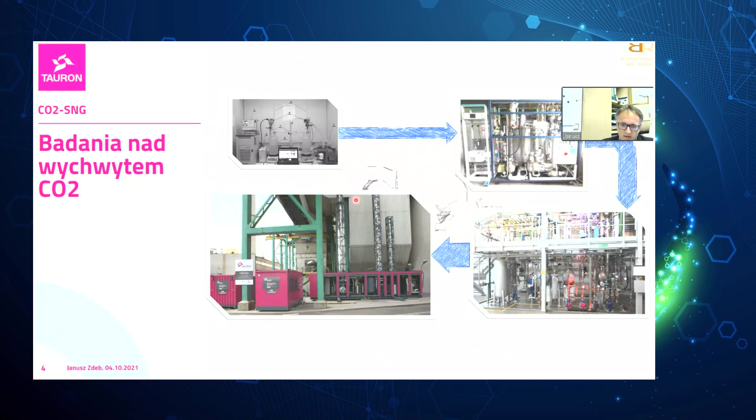In Jaworzno, we had a fluid bed boiler. The installation that we built contained mostly a technological container. We had the desulfurization unit there with additional sulfur removal. We had absorption and desorption columns, whole sets of exchangers and washes in the technological container, then the supervision container in which the technological process was supervised and all the data were registered. But owing to the fact that the installation was modular and mobile, we also have a storage container, to which the dismantled columns would be put for transportation purposes. This installation makes it possible for the gas to flow at 200 cubic meters.

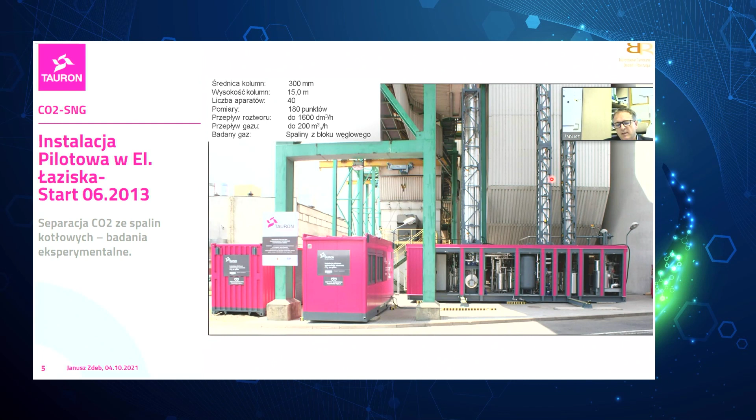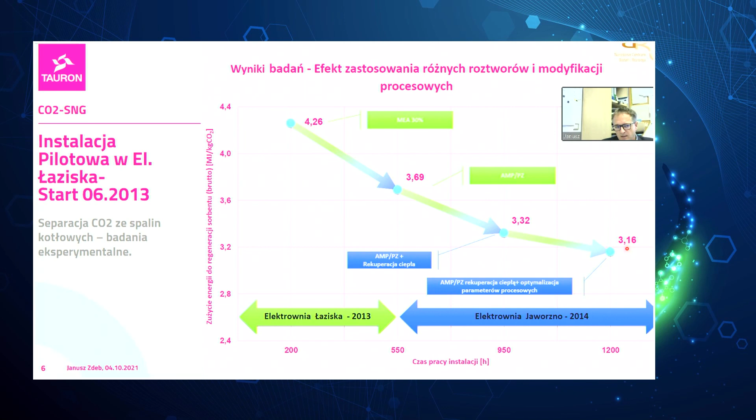We're talking about boiler fumes here. The height of the tallest column is 15 meters. Over 180 measuring points were installed. We started testing in 2013. The first studies were not really optimistic. When you look at literature data, as far as the use of energy for the regeneration, we started at 4.26 megajoules per kilogram of captured CO2, but we managed to get down to around 3 megajoules per kilogram of CO2 captured.

As for the implementation, we've implemented over 30 research campaigns. Over 300 tests were carried out with different changing parameters that would optimize the process. And the result is over 2,000 hours of operation of this installation in those two locations mentioned, and the capturing of around 100,000 kilograms of CO2.

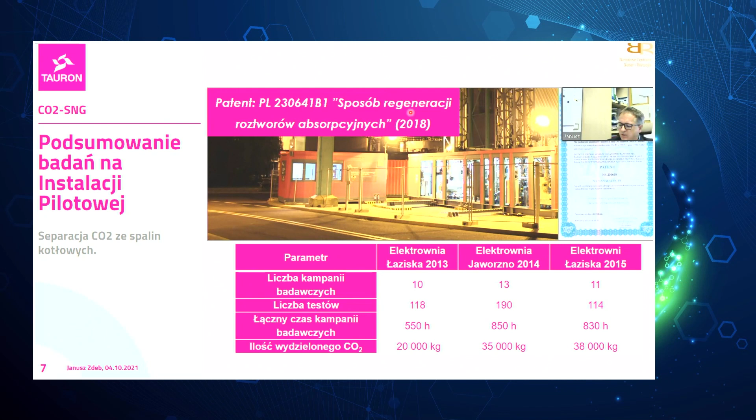Owing to this endeavor, we've managed to get to the heart of the process. We've learned what its advantages and downsides were. Definitely, our approach was a novel one, and owing to this, we've elaborated our own way of regenerating amine, which resulted in a patent that was granted in 2018.

As we know, the energy policy and the stress on development of sources that are pretty unstable on the system make it necessary to introduce drastic changes in the image of power engineering. As the former speakers, moderators said, we are shifting to the other dimension of power engineering, the one in which the dominating function will be played by hydrogen.

With this experience about CO2 capturing and knowing that in such volumes CO2 cannot be accepted and stored, we've taken up steps that would make it possible to change CO2 into a product or for it to become a carrier of energy. And here, analyzing different technologies, observing global research trends, we moved towards power-to-gas technologies, so those concerning methanization.

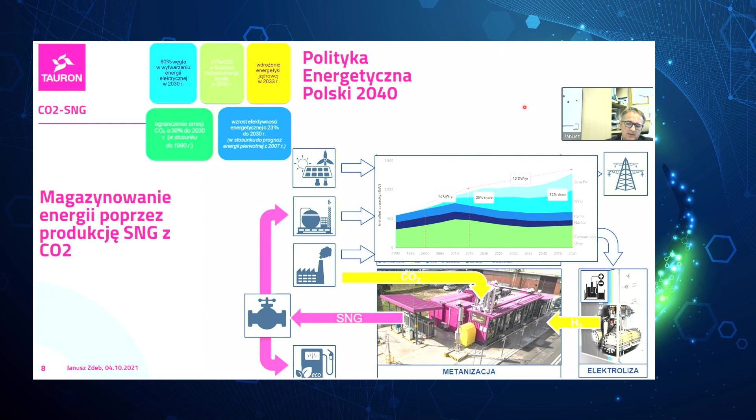We believe that CO2 can be a very good carrier of green hydrogen, and it can be a certain part of the storage, as well as an element stabilizing the power system. This is also confirmed by other sources and publications. You can see any technology of energy storage has its place in this chain, depending on what functions it is supposed to deliver. It should find its way to the mix of the energy system, to the power system. We've moved towards the high-scale storage solutions and also long-term storage solutions.

As I said, the power-to-gas technology, despite it being treated as a storage system, also responds to a few issues that the power engineering today is bothered with. This is related to the reduction of CO2, to the increasing number of unstable sources, so renewable energy sources, which in turn makes the power system, our power plants, work pretty dynamically in terms of the activities they perform within the energy system. Depending on how we develop this element, it can also constitute a protection measure when thinking about natural gas.

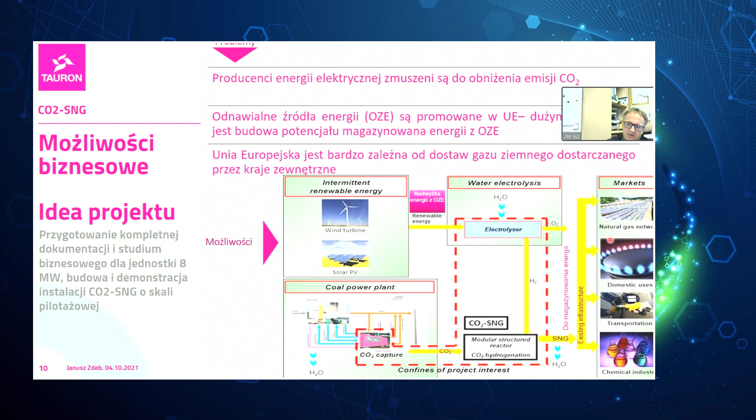So to sum it up, we have intermittent renewable energy, which can be turned into hydrogen. The CO2 source, that is the industry of power engineering, combined with hydrogen, gives us a synthetic natural gas, which can be located on the market today, so it can be given back to the grid, or it can be consumed by end consumers or in transportation.

Looking at it this way, we've managed to obtain financing from the European Institute of Innovation and Technology, EIT, from the Polish section, Knowledge and Innovation Community. We constructed a consortium, an international one, in which Tauron Wytwarzanie was a leader, responsible for the construction and testing of the entire system with methanization. We have foreign partners, both the scientific ones and the industrial ones. We've got CEA, the major French research institute that studied the operations of the reactor on a small scale. We've got Atmostat, responsible for the production of the reactor, and also the Polish side.

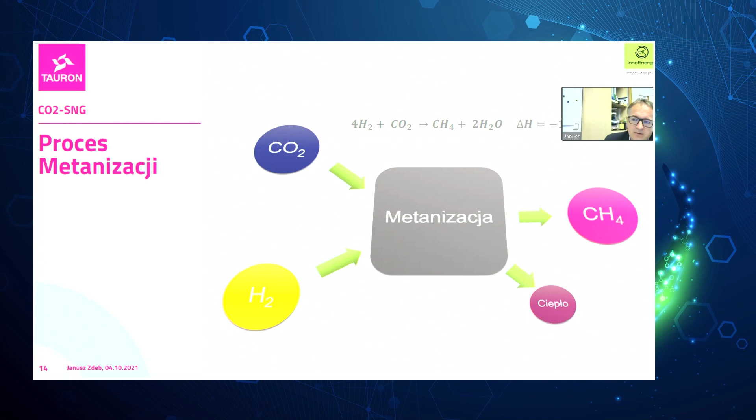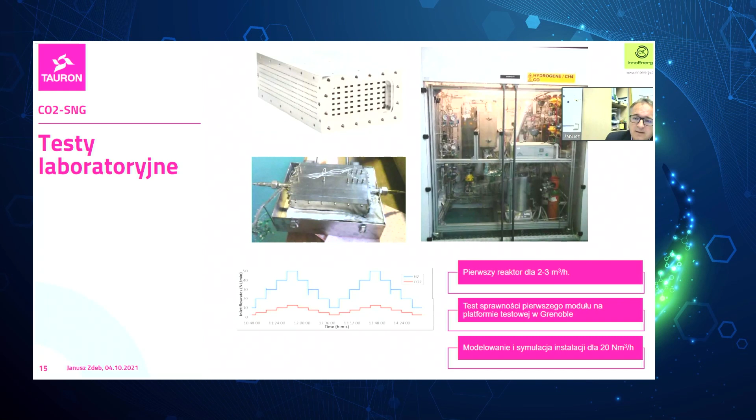Janusz, 5 minutes. Just to remind you, the project was launched in 2015 and completed in 2019. We know what methanization is about. The most important element is the exothermal surplus of heat. The laboratory tests were carried out in France using such a small reactor.

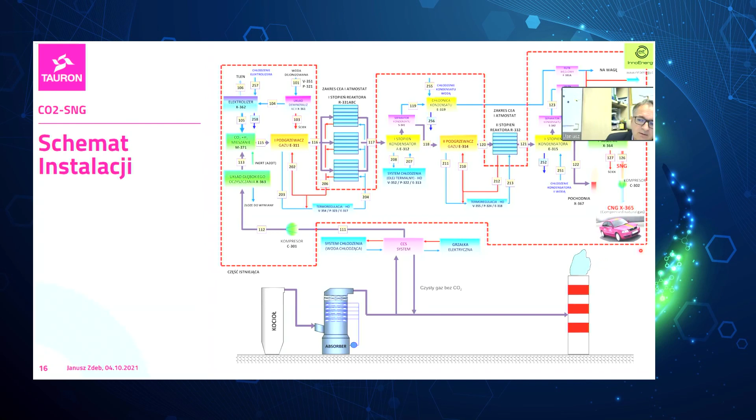The installation, the system tested, contains the electrolysis set and also the CO2 capturing unit, where CO2 is compressed, purified, then it gets to the mixer, then the hydrogen from the electrolyzer is preheated. We have a 2-stage set here. In the first stage, we have methanization, then condensation, cooling, heating. The other step of the reactor, and then depending on the parameters, the gas can be either given to the flare or it can be given to the compression station so that we can use it as CNG.

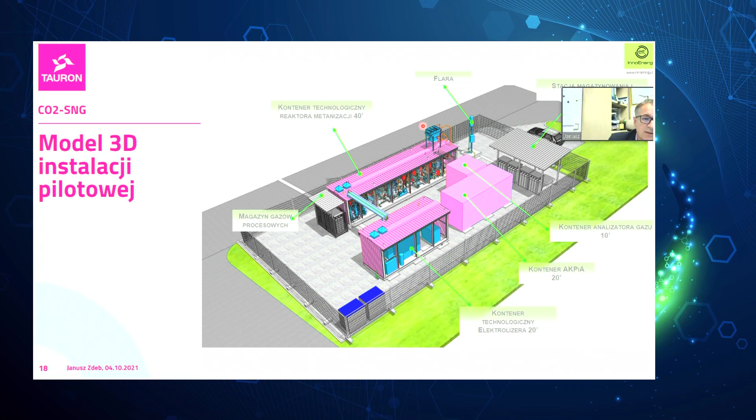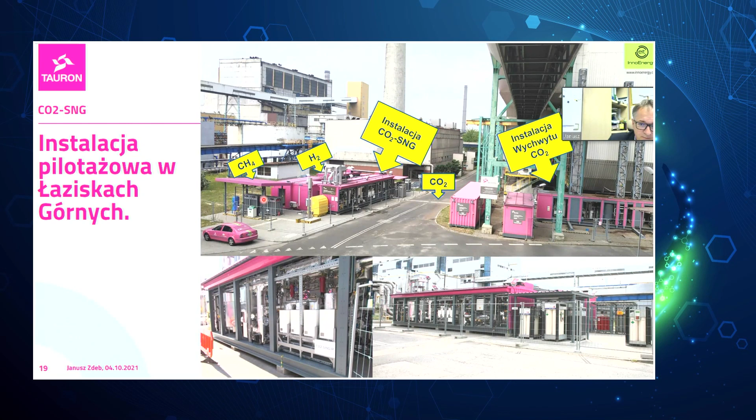So we've got the AKPiA container plus the compression station and a flare that was used for testing gas that does not meet requirements. Well, it was a test. So we tested different parameters. Not always did the quality suffice to compress methane. That was a reality. So on the right-hand side, we've got the existing CO2 capturing unit, the CNG one, and a car specially designed for CNG filling up.

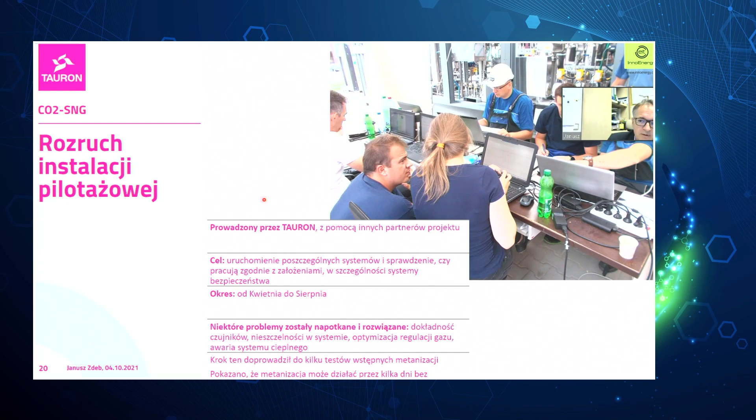A lot of problems occurred. It was new to us. The entire system was moved to the technological container vicinity itself. As you can see, there was an online analysis of all the parameters so that the installation could be launched in the safest possible manner. The first gas with CO2 from power engineering was generated in July 2018.

This is a video. I'm not sure whether I'll be able to play it to you. Janusz, I don't think we have time for it, so let's skip it then.

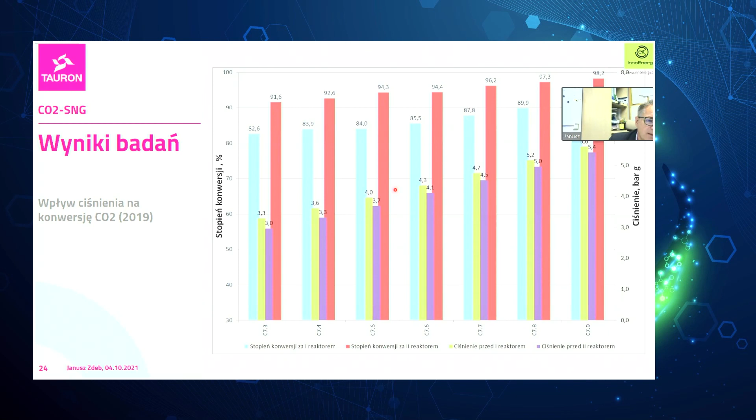The first results in 2019, you see 80% of efficiency as for the capturing. We tested most of all the impact of pressure and temperature on the process parameters, as well as the flexibility of the operation of those methanization reactors. We can see here the changes depending on temperature, depending on pressure. You can see particular efficiencies on the first stage and the second stage of the methanization reactor.

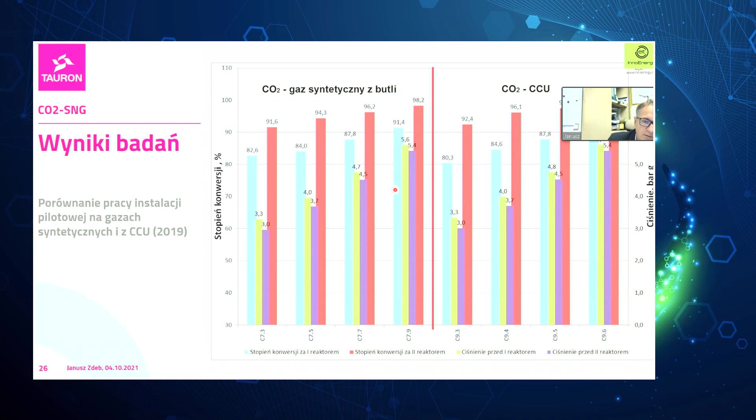We also compared, owing to the fact that this is a research installation, it was possible to apply synthetic gases. CO2 was synthetic from the tank, and also CO2 from the capturing installation that I showed you before. There are no differences, exactly the same parameters. The installation worked exactly the same way.

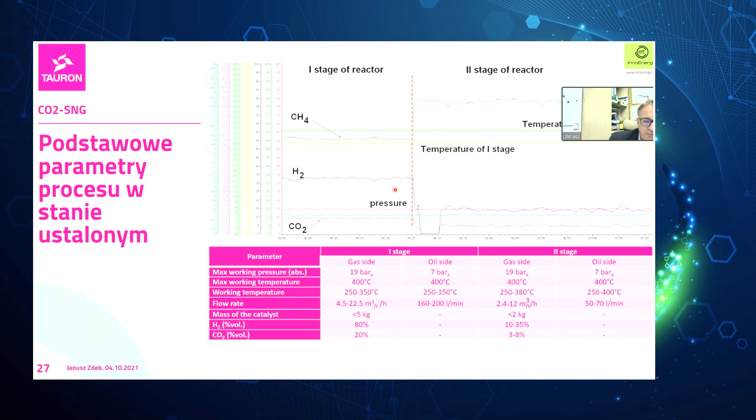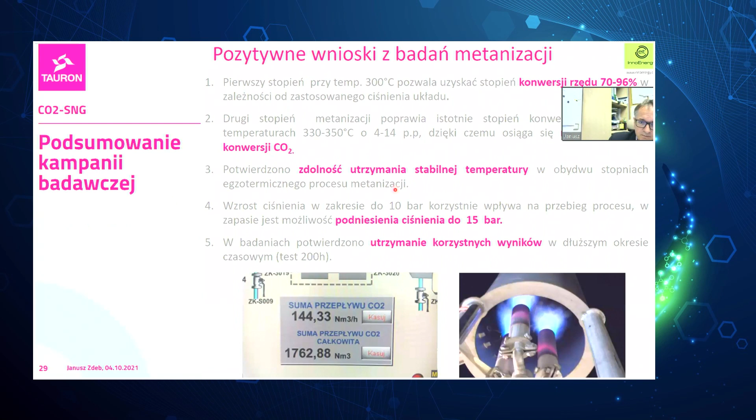A minute to go, Janusz.

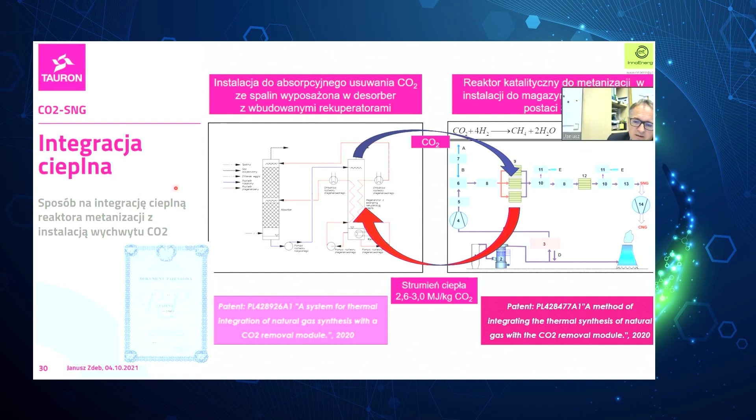Okay, what I drew attention to is the volume of heat from the methanization process makes it possible for us to cover the needs for absorption of CO2 in the installation. So we can say that energy-wise, we can get a balance. And this is a concept that was awarded with a patent last year.

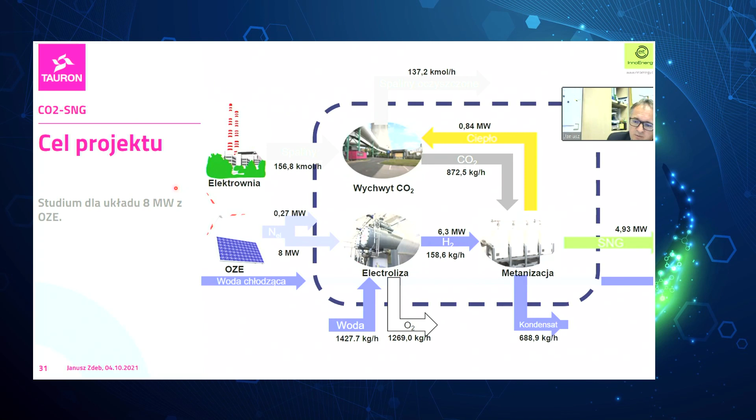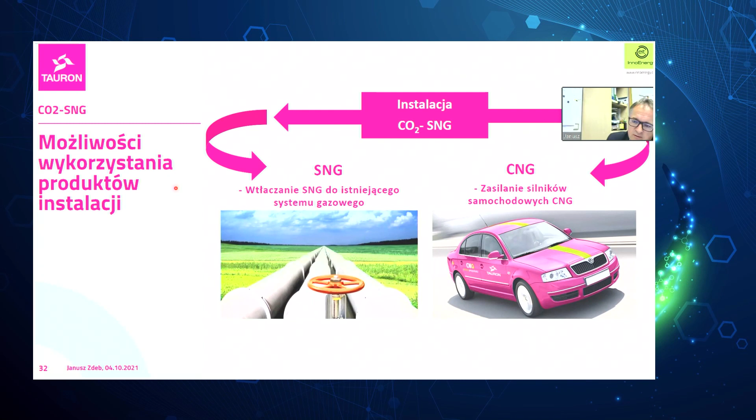As regards the upscaling part, we prepared a concept of installation equivalent to 8 megawatts that would make it possible for it to also use RES and work with the existing capturing system in the power plant. The installations make it possible for natural gas to be fed back to the grid, and also the products of this project can be used as transportation fuel in CNG-powered engines.

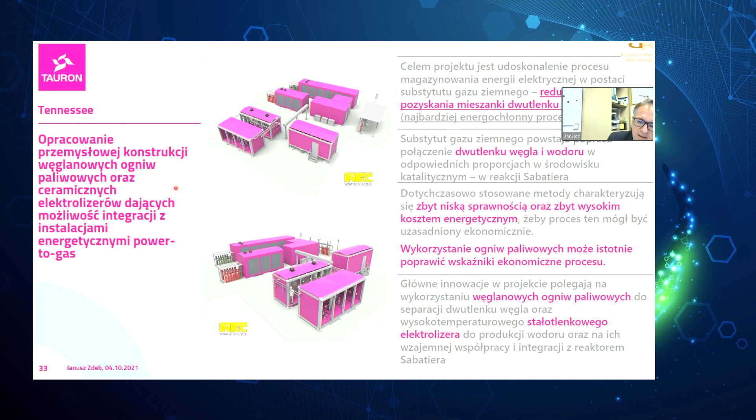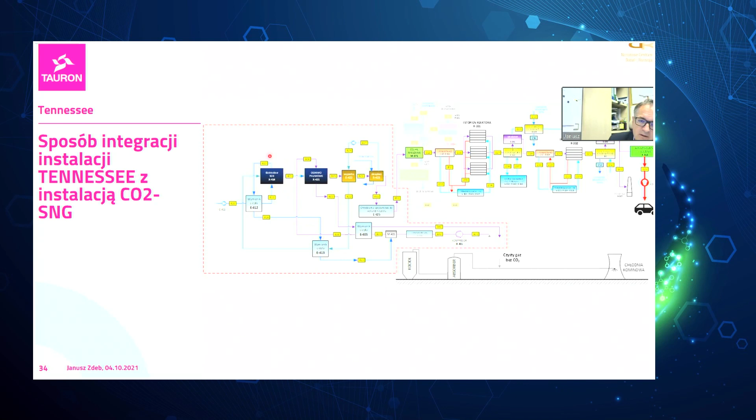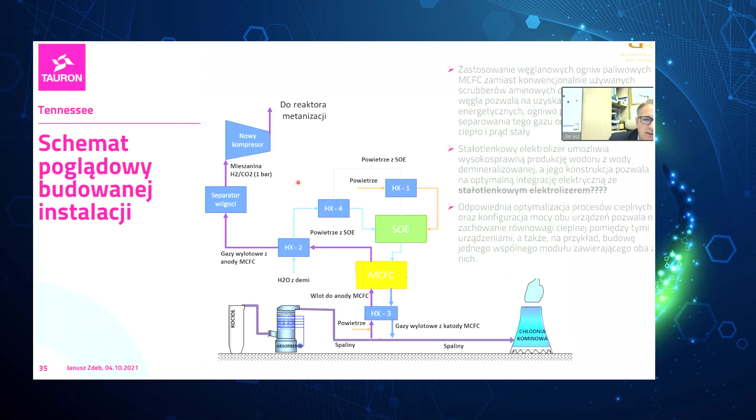For these activities that concern CO2 SNG, we decided to optimize research, and we struck a cooperation with the Warsaw University of Technology. The result of it is a project analogous to the one we have, but using fuel cells, but also ceramic electrolyzers. And the installation of CO2 capturing in the project is near to completion. We are substituting MCFC fuel cells, and we use the SOE electrolyzer. We certainly hope that this installation will be launched later this year. The first tests show that this is viable.

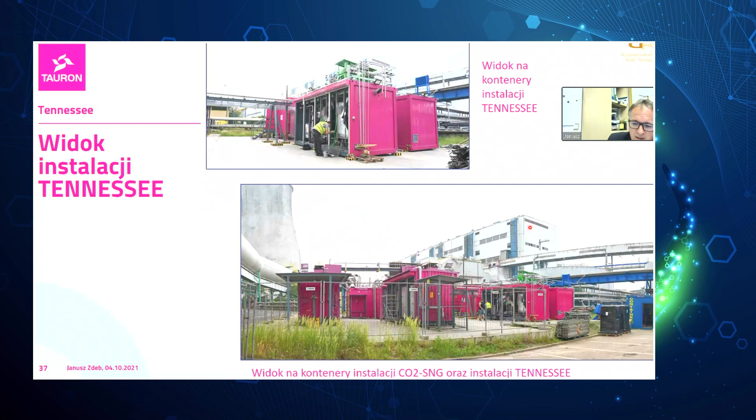Now, this is what it more or less looks like in terms of the Tennessee installation. This is this part, and whilst this part has CO2 SNG, it is combined with processed gases that we generate from the Tennessee installation. So we produce the mixture of CO2 and H2 in the proportion 1:4, so that we can deliver it to the methanation reactors. It is a test installation of rather low level in terms of scale. But we believe that the fuel cells have their future, so it is certainly worthwhile having a close look at them, developing their uses. In the meantime, you saw a few pictures of the actual system.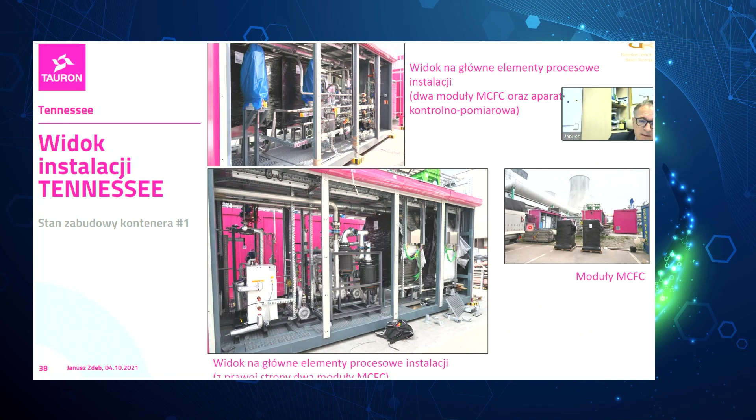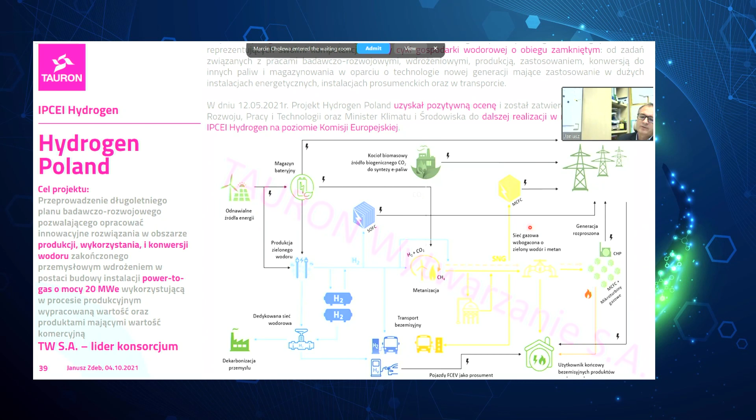And what can I tell you to end on? Well, all the experiences that we've gained over those 10 years resulted in the fact that we prepared a project within the competition IPCEI Hydrogen, and the Ministry of Climate and Environment was one of the parties that issued a positive opinion. So we are going to keep on developing those solutions, hopefully moving on to commercial scale, so that we can show the use of methane or hydrogen also in other branches of the economy, so that it can be used in an optimal manner and inscribe itself in the existing infrastructure with alternative uses.

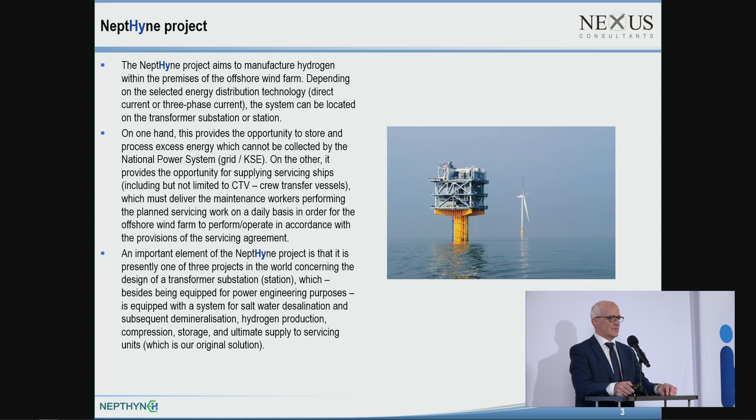As I've briefly mentioned while describing what it is about, we produce hydrogen from salted water. First of all, we want to use it for the bunkering of ships that call at offshore wind farms to service them every day. It is one of three projects of this kind implemented globally now. I'm talking about them being implemented because our project is not only in the conceptual phase, as you'll learn in a moment. The main issue as regards the production of electric energy...

...for the wind farms is that we cannot always give the electricity back to the national grids. These are fledgling diseases - the same was the case in the UK, Denmark, and so on. So they keep on searching for solutions.

What to do when the energy cannot be received by the land? How to balance the production of energy from offshore wind farms? That is why we are thinking about producing hydrogen locally.

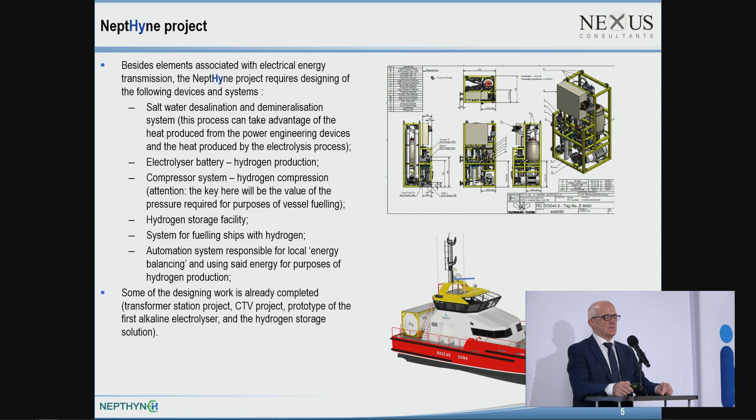As mentioned, the project constitutes a few components. It has elements that will make it possible to obtain salt water, desalinate it, demineralize it, then divide it through electrolysis. Hydrogen will be produced, compressed, stored, and then used for bunkering purposes for vessels.

The project, as mentioned at the very beginning of my contribution, involves companies actively operational in the hydrogen technologies cluster, but we also invited PCHET to it. PCHET is a forerunner in terms of gas solutions to be applied in the maritime industry.

In a moment, my colleagues representing particular companies will explain the area of their responsibility within the project. As of today, we have a lot to boast already.

The NeptHyne project is part of the National Recovery Plan. We have also managed to inscribe it as one of the projects into the European Clean Hydrogen Alliance, and the project today is one of the elements related to the realization of the European hydrogen strategy and also implementation of local content by developers and investors into offshore wind farms in our country.

When preparing this presentation, I wanted to tell you also about what possibilities result from the project, which is a research and development project, but also about its significance for the development of our own local economy.

On the one hand, we are talking about entirely new solutions in terms of maritime sector applications. So the vessels have to be fitted with a full-fledged system for producing energy from hydrogen and distributing hydrogen. We need to design the systems for the production of hydrogen, not only on the water, but also on land within the port infrastructure.

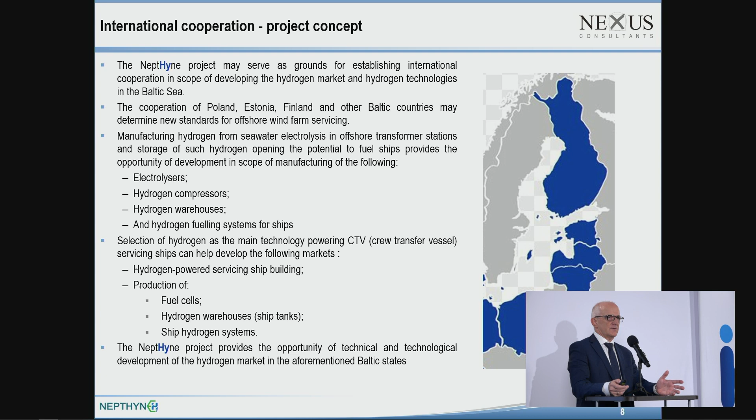So we will need suppliers that will deliver energy storage, fuel cells, all sorts of system elements needed. That is why we are laying foundations for the construction of a big business.

When we look at the developmental strategy in terms of offshore, let us see what kind of challenges we are facing today. Today, we have installed 23 gigawatts of power in offshore wind farms, but we are to reach, until 2050, 300 gigawatts. On the Baltic itself, there are supposed to be 93 gigawatts of installed power. And this is supposed to happen in 28 years to come. This is quite a challenge.

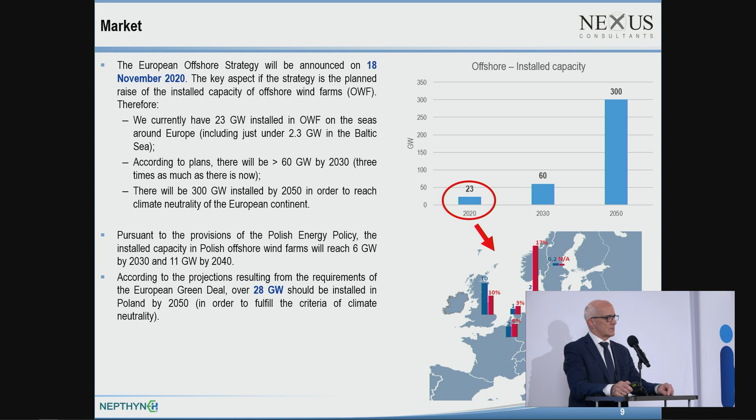In order to meet the criteria that result from the Green Deal, Poland in 2050 should have 28 gigawatts of power installed in offshore wind farms.

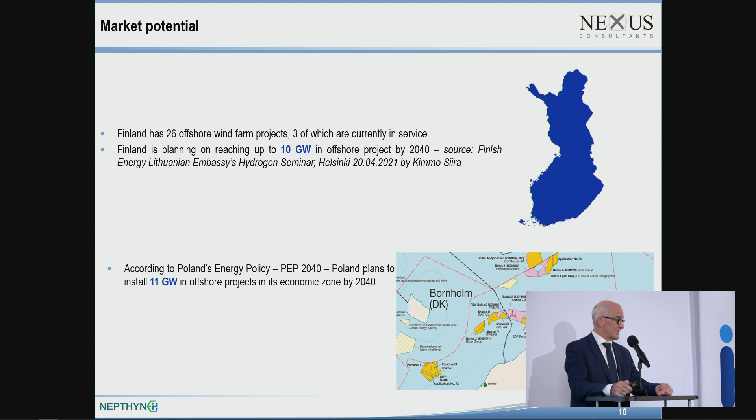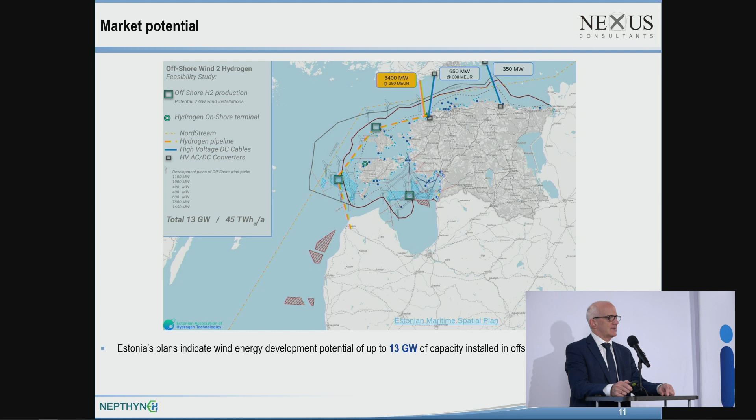Now, if we only took into account those three countries, see what kind of potential we are talking about. I took the liberty to focus on just a fraction of the entire chain of value added concerning the vessels servicing wind farms.

In other words, if nothing changes, then, ladies and gentlemen, we talk about 2040 being the year in which we need 340 new CTV units. We are talking about a gigantic market, over $1.5 billion in the budget that will have to be spent for such vessels.

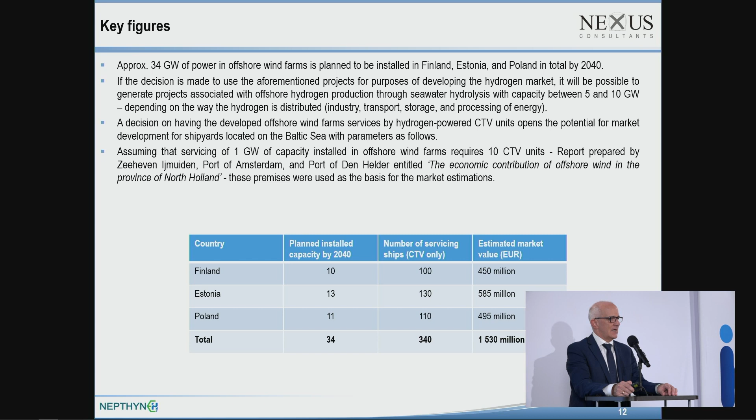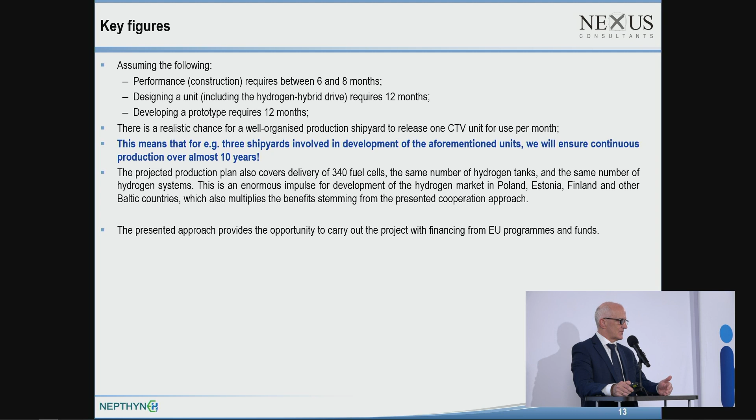What does that mean? That means, ladies and gentlemen, that when you look at the process of constructing such vessels, when you look at what it looks like to prepare the project, to design and to prepare the prototype, then the sheer number of units required means that for 3 shipyards located on the Baltic, we have the full production portfolio for the decade to come, which means that we also need suppliers of components mounted on those vessels. So this kind of projects generates unbelievable opportunities as far as development goes, but we need to meet the standards and realize them first.

That is why the steps we are taking now involve promoting our project in the countries already mentioned, Estonia and Finland, where we try to create new standards for servicing offshore wind farms based on units powered with hydrogen. And as of today, pretty soon we are about to sign a big agreement that will finance our project.

As I've mentioned, there are 3 companies implementing this project. I would like to ask BPRORAF to present now, because Jakub Roszkiewicz, who was supposed to present this part, unfortunately cannot be here as he attends a competitive conference in Amsterdam, also on hydrogen, and his flight was delayed. So instead I will tell you about this part of the project that BPRORAF is responsible for, which belongs to the technological group called ASE.

The ASE group is a company that was brought up, so to speak, on the chemical and refinery sector. It is a company that today realizes projects mostly in Poland concerning hydrogen production, mostly from natural gas. All those hydrogen nodes seen in Trzebinia or Gdańsk now result from the activities of the ASE group and BPRORAF. These are the projects I briefly touched upon a moment ago.

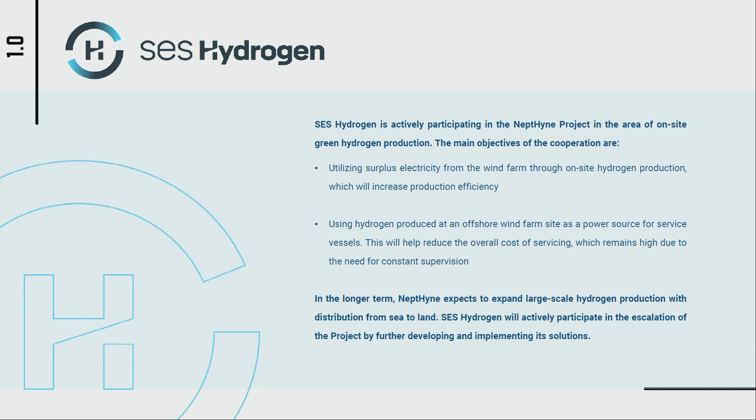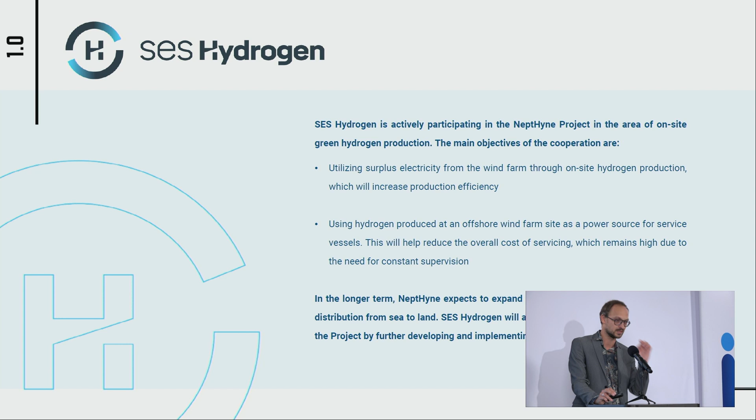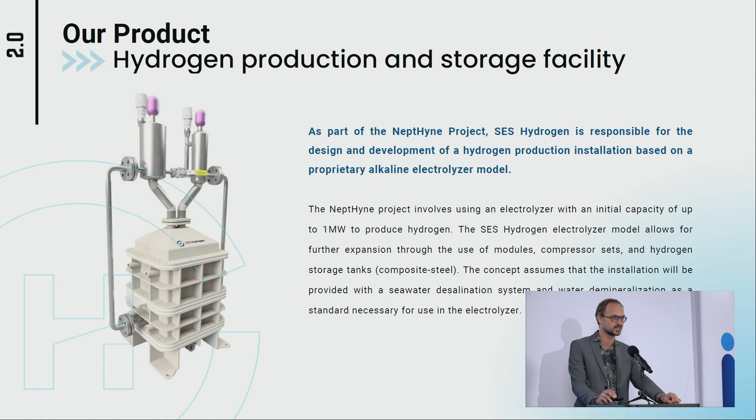What is the heart of it? The company does not limit itself to building electrolyzers and the system. We have alkaline electrolyzers, but we are also working on other kinds of electrolyzers, and on the boilers I mentioned. The heart of our project will be a modular installation made up of many units that together make up 1 megawatt. It will be fitted for maritime environment, so that after completion of the project it can be mounted permanently on the station.

This is the scope of the project. I'm displaying it here, but I wouldn't like to burden you now and bore you with the details at the moment. But we believe that this project, as Tomasz mentioned, is one of the major projects in terms of the development of using hydrogen in maritime installations. We believe that this goal presented by Tomasz and also presented in the Polish hydrogen strategy is attainable, and we would like to be part of it.

As for the scope of work awaiting us until the end of 2023, this is completing R&D work on the electrolyzer and the entire installation, then its certification, ATEX certification of the electrolyzer, and also maritime certification, which slightly differs from the ones for electrolyzers that are used out of the maritime context. So we hope, as we present here, that by 2023 this work will have been completed and it will be possible to join in the celebrations of the installation launch in 2024.

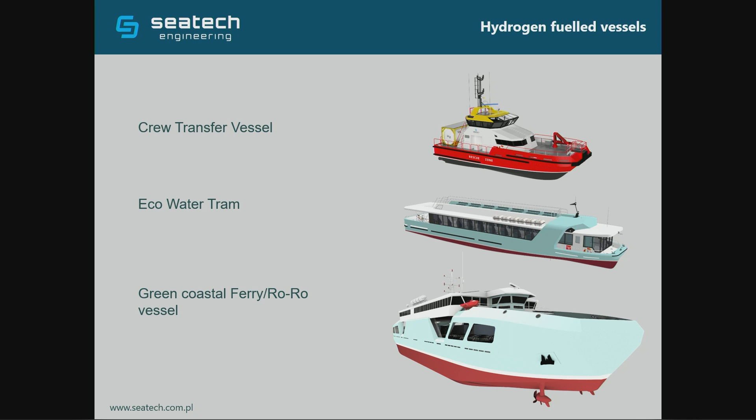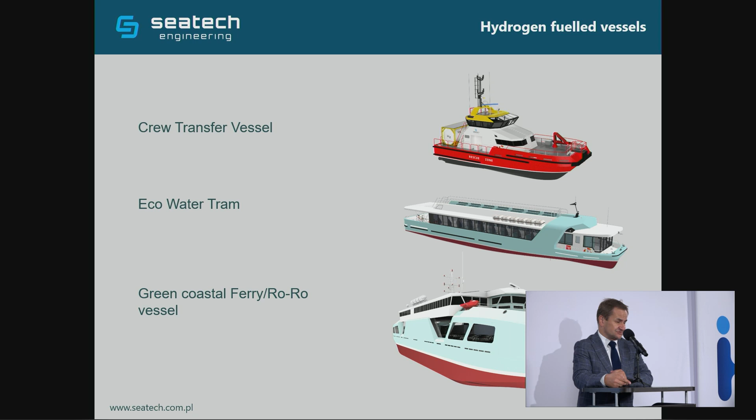And these are the three types of vessels that we would like to propose as ideal vessels that could use hydrogen obtained owing to the electrolysis process in offshore wind farms. The first one, as mentioned by the former speaker, is the one for servicing, so for transporting the workers onto the platforms, onto the wind farms. Every 10 turbines need such a vessel. Every vessel can take on board, depending on configuration, between 12 and 24 service workers. And we believe that the perfect fuel, of course, would be hydrogen obtained in the electrolysis process.

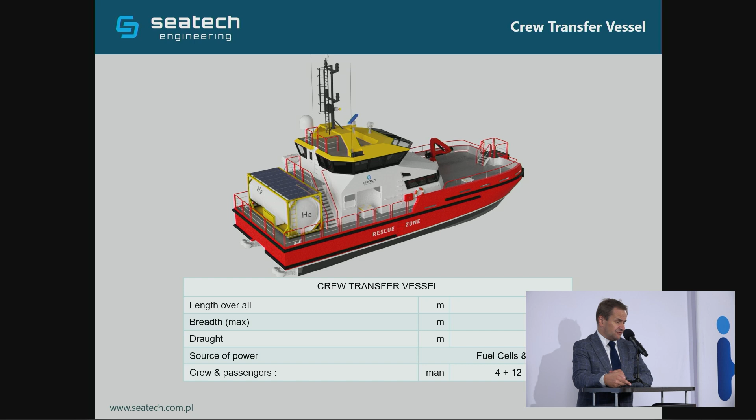And we envisage that the best solution would be placing it in an exchangeable container that could be taken out instead of spending a lot of time on bunkering. But the technology is developing continuously, so we don't claim it to be the final version of this design. All sorts of issues concerning propulsion are down in the bottom part of it, in the floaters. The batteries power the propellers through direct current.

And you can see the vessel is to transport service workers. Owing to this platform on the bow, we'll be able to climb the wind turbines. The location of the wind turbines speaks for going for small service vessels from Ustka and Łeba, reaching the places where the turbines will be placed. The distance is not big.

We believe that such a vessel of 20 knots will during one day be able to transport the service workers sufficiently. Of course, we can also propose a bigger one, a base, from which the smaller ones would take the service workers and transport them further on.

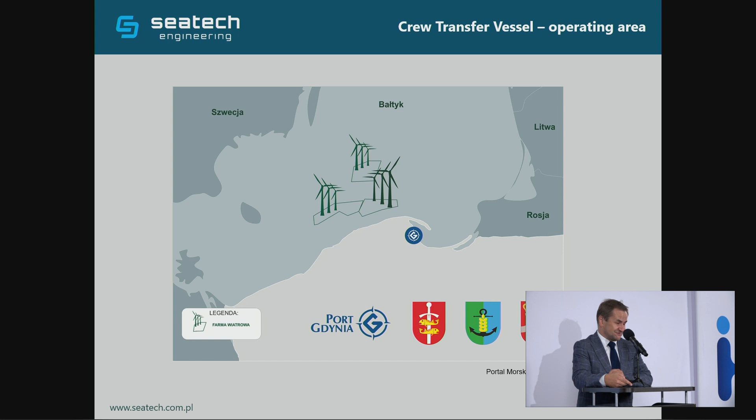But the big portion in the budget of the companies dealing with servicing of the platforms is the wages for the employees. So when we place them on board a ship and for 2 weeks they live on the sea, then the wages, of course, will have to be higher. So we believe it's better for them to stay at home and be transported by those small vessels, taking them from Łeba or Ustka.

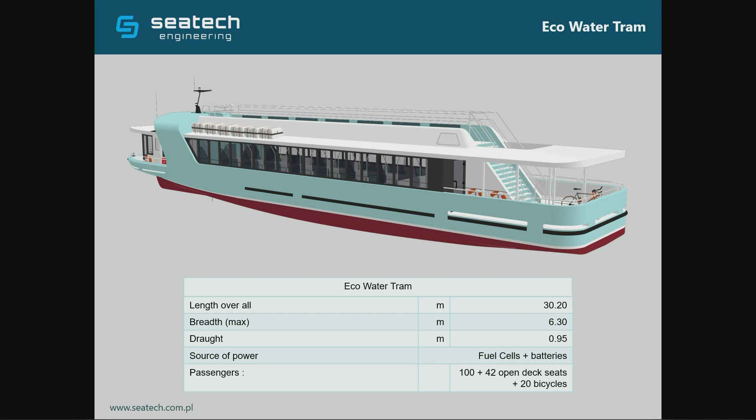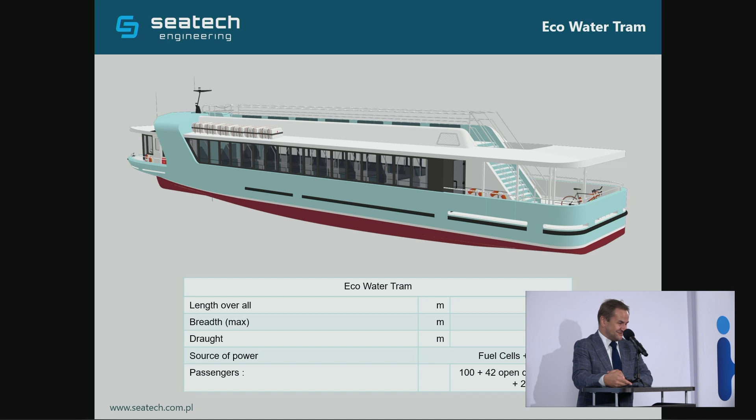Another vessel that we would like to offer to be used, and again powered with green hydrogen, is an eco water tram that can take around 100 passengers. Here we would like to propose the pressure tanks with hydrogen to be placed on top of the vessel. And owing to our liking for bicycles that I share with Tomasz, we would like to have a parking for bicycles placed in the rear part of the vessel, rather than the tank with hydrogen.

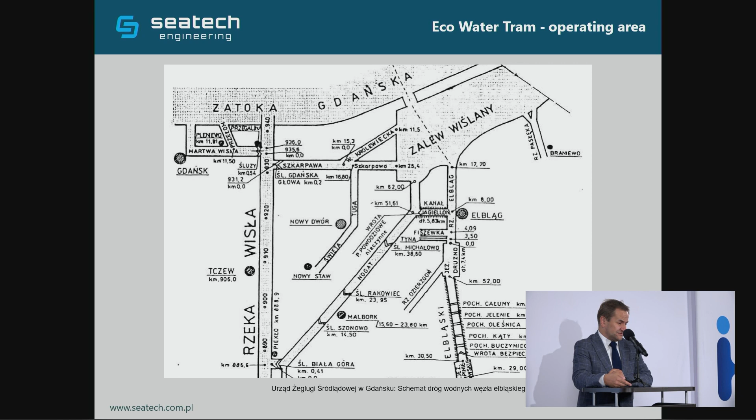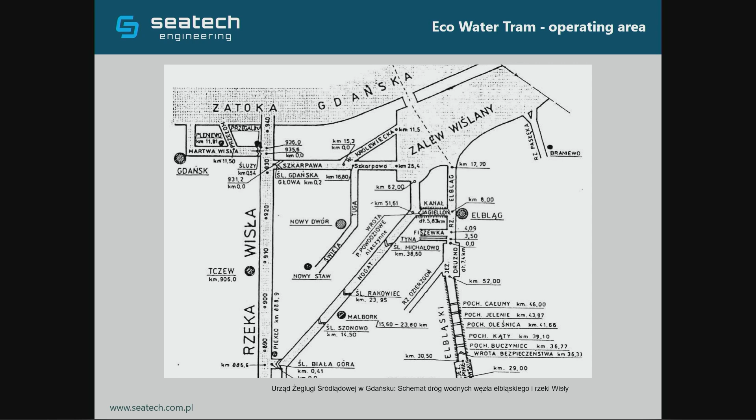There are different configurations that we offer. It could cover the entire network of waterways around Gdańsk. This is a map that looks somewhat archaic, but it has been downloaded only recently from the official website of the Inland Waterways Office, and it shows already the installation in the Vistula spit that has been dug up.

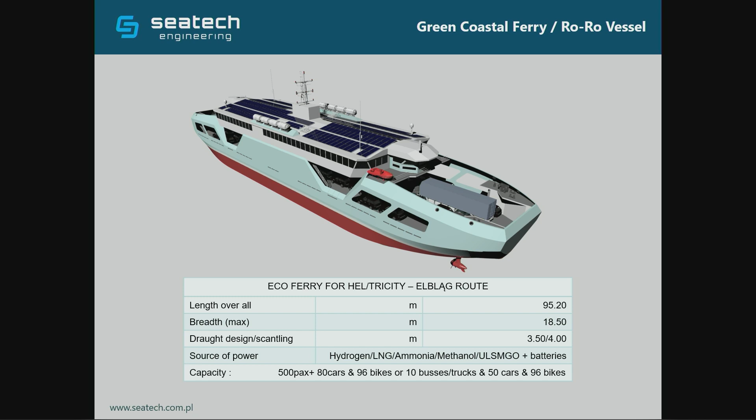So I would like to use it to shift to another design, also hydrogen-powered, that is the passenger ferry that could transport around 500 passengers and 80 cars, that could take the burden off the road network by transporting tourists during holiday season from Elbląg to Hel via the Vistula spit. Now the speed is around 20 knots, so not so much time compared to going by car through the city and Władysławowo, provided there are no traffic jams. When there are traffic jams, of course, it is beneficial to use the ferry.

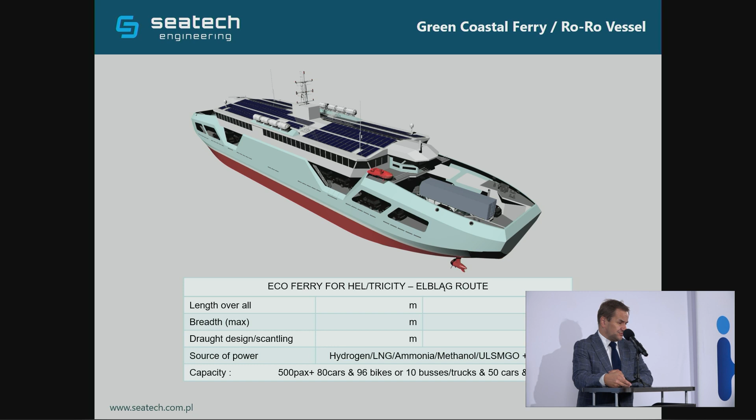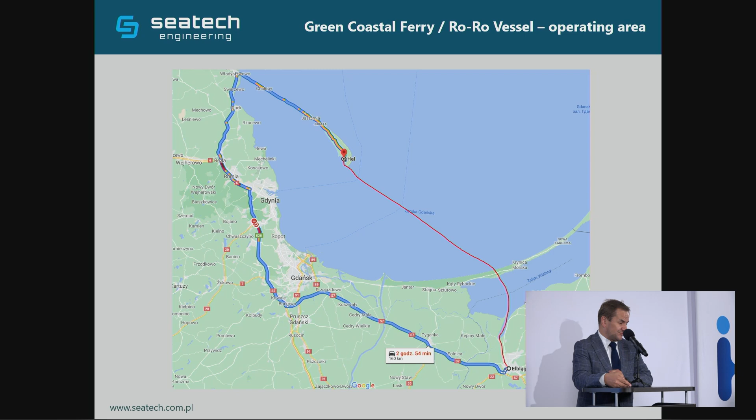At night, it could transport cars that would deliver goods to all sorts of shops operating in the Hel Peninsula. There are 20 connections for charging electric cars as well, so these cars could also be electric. So, thanks to hydrogen, we could have a shortcut, which would be zero emissions, and which would definitely bring life to the port of Elbląg.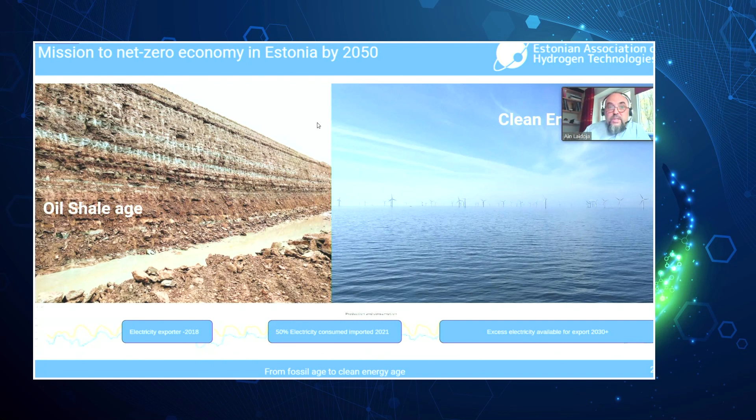Right, let's have a look where we are now with our electricity and energy consumption. You see, we are consuming, say, 10 terawatt hours of electricity, 10 terawatt hours of heat, and also we consume 10 terawatt hours of liquid fuels. We have two main suppliers in Estonia. The fuel is coming mostly from Finland, from Neste, and another big supplier is Orlen.

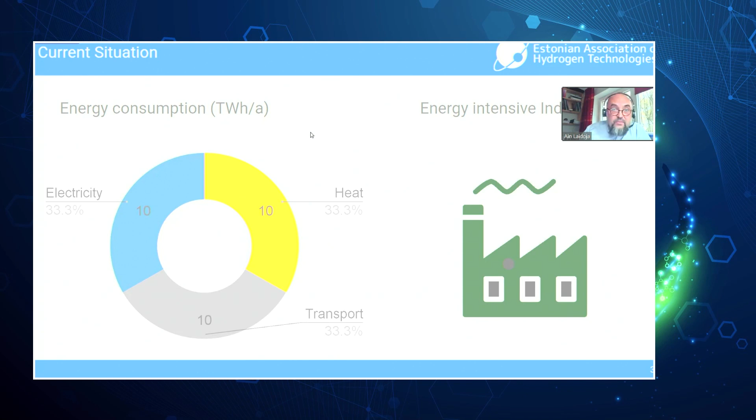So normally, if we talk energy, we talk 4 sectors. The missing slice in the cake is industry. We don't have energy-intensive industry in Estonia, but things can change. The precondition for industry is availability of hydrogen, and that might happen in 10 years' time. So, climate neutral Estonia. In the EU, the trigger for the hydrogen economy, we see, is climate targets.

So let's have a look what sectors have to be decarbonized in Estonia. We talk power, 10 terawatt hours of electricity consumed, 50% imported today. If we talk heat, mostly heat is covered by local biomass. The peak load is covered with natural gas, and also some domestic consumers are using natural gas.

In the transport sector, on top of liquid transport fuels, maritime fuels have to be decarbonized, also aviation. Only one ferry company in Estonia, Tallink, is consuming 2.4 terawatt hours of liquid fossil fuel today. That has to be changed. Gas infrastructure, 4 terawatt hours. Something different should be flowing in our gas grid in 2050.

So what sort of resources have we got in Estonia? We have wind. As Thomas mentioned before, we have evaluated how many offshore wind parks we can install. Local companies have come up with new ideas, new development plans. The wind parks and wind turbines are getting bigger. Now we are counting, but we have a wind development plan of 76 terawatt hours.

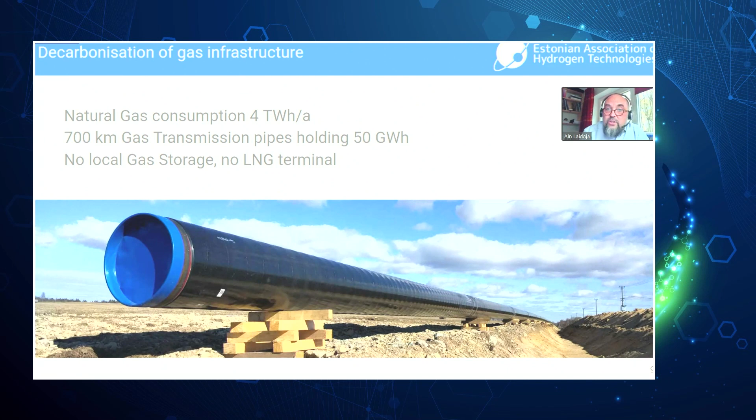So I mentioned the natural gas, 4 terawatt hours. We have no idea at the moment how we can make it different than the fossil one. But we have to think about that. Is that going to be hydrogen flowing in this tube? Or are we talking biomethane? These biomethane resources are also limited. We don't have a gas storage in Estonia. We don't have an LNG terminal either in Estonia.

Do we have a plan, you may ask? Of course we have. Rather than a plan, it's a vision. It's the hydrogen backbone vision. Estonian TSO Elering is a part of that plan. And if you look on a map, you see there is a plan or idea or vision to build a hydrogen network from the Bothnian Bay, which is between Finland and Sweden, down to Central Europe to carry hydrogen. And we are planning to be part of that business.

So this is another vision. We can't do that alone. We have to work together in this region. You see, Sweden, Finns, they can produce offshore wind, produce hydrogen, and send it where the market is, where the demand is. We believe the demand is in Central Europe. And it looks silly if we are not joining this project, if the tube is bypassing Estonia, and we just need to get a little share in that tube, which is helping us to get rid of our product.

So, as I said, storage. What is a storage? If we talk day and night storage or short-term storage, battery works fine. Also works fine the pumped hydro storage plant, which is planned in Estonia as well. But this is workable only for 12 hours. 12 hours is not enough. Sometimes we have no wind for 2 weeks in Estonia. So that means we need something different. And this is helpful: the hydrogen backbone connected to Central Europe with a salt cavern, that might be a solution. Let's find it out.

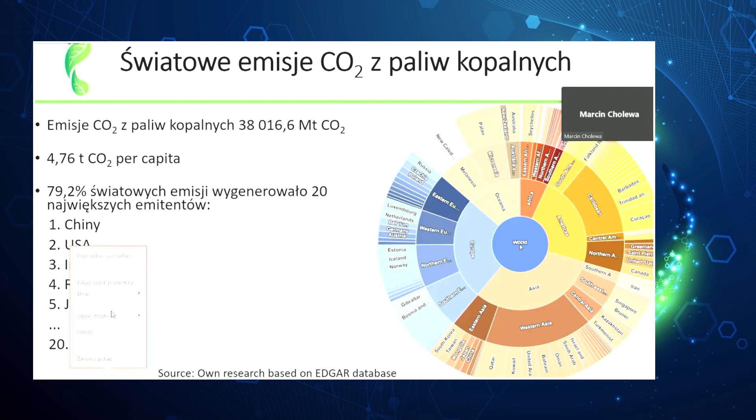So we know very well the level of CO2 emissions is constantly increasing. Global CO2 emissions coming from fossil fuels in 2018 were nearly 38 billion tons. On the graph, you can see which regions, which countries are responsible to the greatest degree for CO2 emissions. 80% of global emissions come from 20 countries such as China, USA, India, Russia, Japan, and on that list of these 20 countries we have Poland as well, in 20th place.

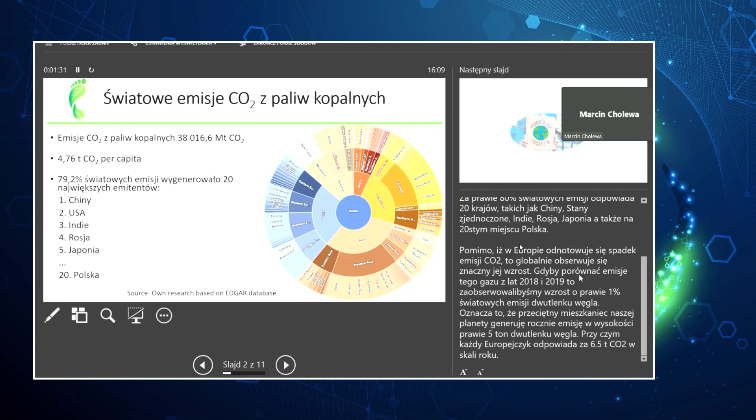Despite the fact that in Europe we see a drop in CO2 emissions, globally we can observe a significant increase. If we were to compare emissions from 2018 and 2019, we could see an increase of nearly 1% of global CO2 emissions. This means that each and every one of us, each inhabitant of our planet, generates emissions in the amount of nearly 5 tons of CO2 annually. Of course, Europeans generate a bit more. This is about 6.5 tons CO2 annually.

The growing quantities of emissions and changes require active steps to handle their negative consequences and not to result in climate catastrophe on the planet. At the end of the 1980s, it was pointed out that climatic changes need to be stopped. Since that time, we've taken many steps aimed at fighting global warming. In 2015 in Paris, our leaders entered into an agreement based on which our efforts aimed at limiting the temperature rise to a maximum of 1.5 degrees Celsius were put in writing.

That means obviously limiting, until 2050, greenhouse gas emissions to levels which will allow them to be absorbed by the ecosystems, or introducing technological solutions which will aid in reaching that goal. And many of us see hydrogen as key in reaching that goal. One of the tools which helps us to estimate our impact on the environment is the carbon trail, about which I would like to tell you a few words.

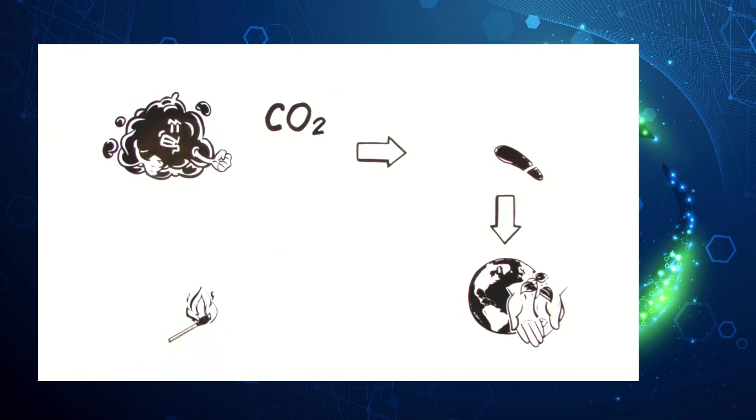Carbon footprint. But what is that exactly? Just like an actual footprint, it's a mark you leave upon the environment. No, not with your shoes, but with every action that releases carbons. Those are the harmful gases, such as CO2, which are pumped out by burning fossil fuels like oil and gas. The more fuel you use, the bigger your footprint will be. You may think that by driving your car, the only carbons you release come from the engine, but no. Consider the carbons that are emitted just to get fuel into the tank. From the energy needed to extract the oil from underground, the pollution caused by transportation and refinement, to the final delivery to your local petrol station.

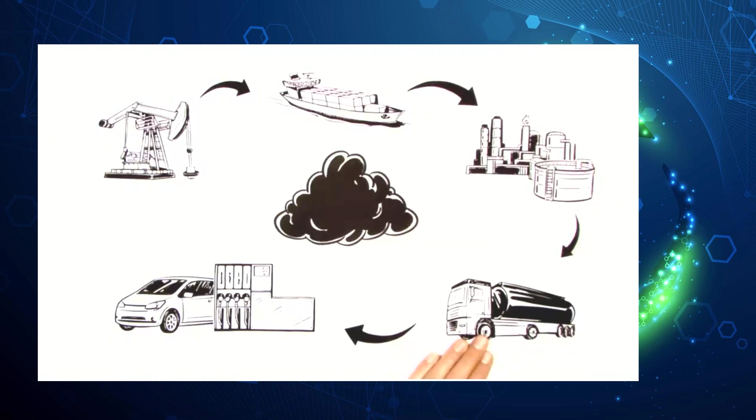Not to mention the CO2 released by manufacturing your car in the first place. More than you thought, huh? So unless you live in a cave, you and everything you own has its own carbon footprint. Read a book: printing and distributing uses energy. Brush your teeth, and your utensils will have a history in a factory. Even something as basic as an apple could have traveled hundreds or even thousands of polluting miles to end up in your local supermarket. You see, it's pretty much impossible to leave no carbon footprint behind, but that's no reason to stop trying. Think about your actions and choices, and you'll be able to reduce your personal mark after all. That's how you really put the boot into climate change.

So, what is actually carbon trace? We might say that it's the sum of emissions of greenhouse gases, which are created during the life cycle of a given product or service. It can also be calculated for any event, organization, city, county, or even a country or an individual.

This indicator is a tool to coordinate various decisions and measures. It also allows us to diagnose main pathways of greenhouse gas emissions and take steps aimed at eliminating them. The carbon trail... sorry, certain technical problem here.

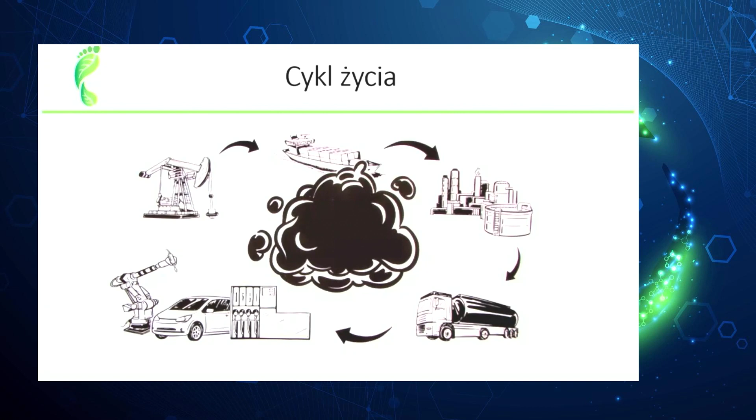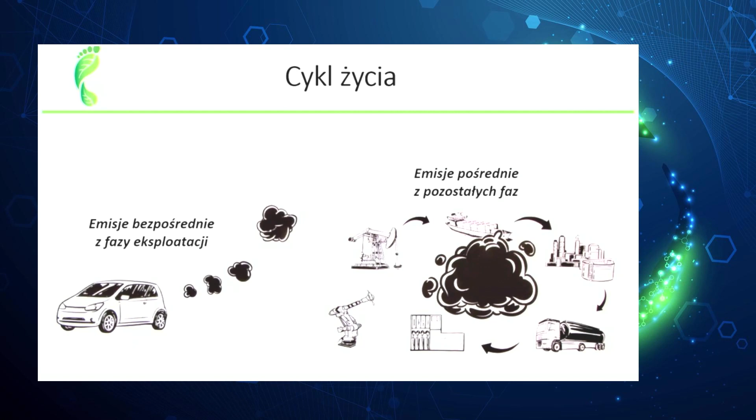But going back, the carbon trail is expressed as the equivalent of CO2, which is a universal unit pointing to the increase of each of the greenhouse gases. You probably still have in mind the movie we've just seen, which presented the life cycle of a car trip. So in calculating carbon trail, it's important to take into account both direct emissions, taken into account when using the vehicle directly, and other emissions which stem from the entire life cycle of the product.

In order to obtain a cohesive framework for calculations, the calculations of carbon trail were standardized. The most popular standard, also dealing with GHG management emissions, is the GHG Protocol standard and the ISO 14064 norm. Regardless of the method we choose, it's necessary to carry out an in-depth examination of key positions in organizations, which can be significant sources of burdening the environment.

A few words about the GHG Protocol, the greenhouse gas protocol. It has 3 ranges of emissions within which we have all emissions produced by our enterprise, especially those directly emitted by us, as well as those from outside organizations. The first range, marked in green, are the direct emissions created by burning fuels in stationary or mobile points belonging to the company, or supervised by the enterprise. These emissions come from, among others, burning fuels in our own boiler rooms, generators, cars, as well as the leakage of freezing agents.

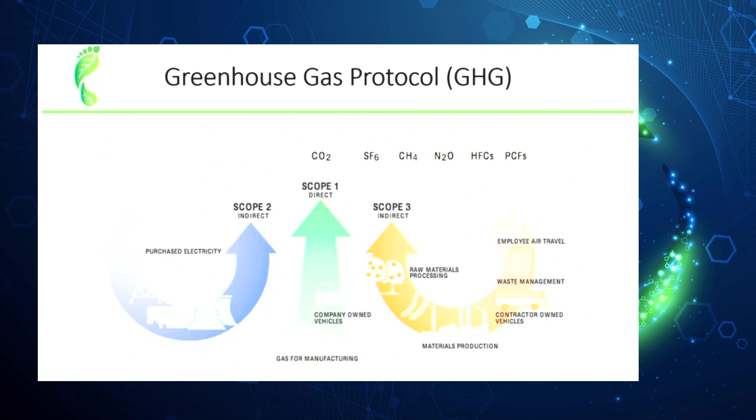Some manufacturers already give information on their products regarding CO2 connected with producing a given product. Personally, I saw on Coca-Cola bottles information regarding the fact that production of the bottle is connected with generation of such and such amount of CO2.

But why should we calculate the carbon trail at all? Well, the biggest advantage of doing that is simply consciousness of the fact, gaining knowledge of the emissions that our organization or product generates. Another advantage is the possibility of comparing our emissions with competition, which may also have a motivating factor.

Well carried out calculations allow us to diagnose at which level of production most emissions are generated, which in the future will allow us to take remediation measures. Optimization can be very simple, for example getting rid of empty rounds in transport or implementation of electronic document flow.

Transparency - by transparency we understand the possibility of being a transparent, well-trusted company, also competitive in comparison to others, compared to those companies which did not calculate the carbon trail, by reporting to...

CDP. Another advantage can be the possibility of developing certain plan strategies based on which we can attempt to decrease the emissions generated by our company or product. Another point is meeting the expectations of demanding customers who are concerned about the environment. Eco-signage - it's also the possibility of using independent eco-signage on our products, which will allow us to demonstrate that we are a responsible and eco-friendly company.